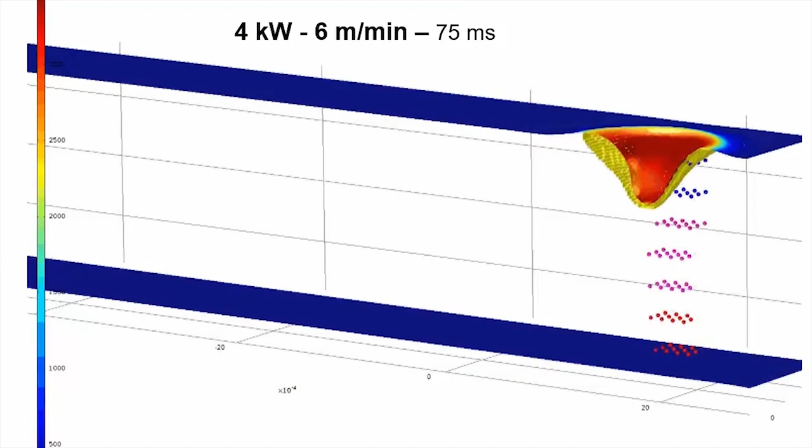Let me explain the significance of this. Choosing a laser for a particular application, whether it's for cutting, welding, or anything else, depends strongly on the beam characteristics. The size and shape of the spot, its rate of divergence, and its distribution of intensity are all very important.

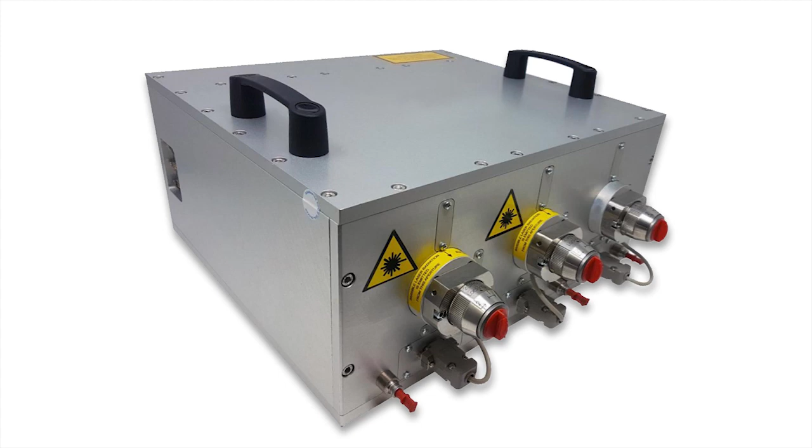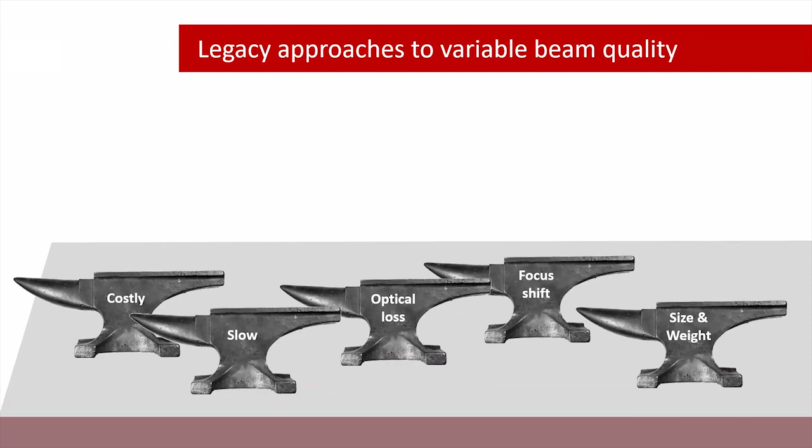Changing the beam quality to address different applications required the purchase of multiple lasers or implementing very expensive accessories. These legacy approaches to variable beam quality introduce significant complexity and cost. We can identify numerous other issues responsible for limiting the acceptance of these legacy approaches to the industrial market.

nLIGHT's new generation of industrial fiber lasers highlight the simplicity of Corona. Programmable brilliance from a single, small format fiber laser, enabling great versatility for machine tools and numerous degrees of freedom to dial in process recipes.

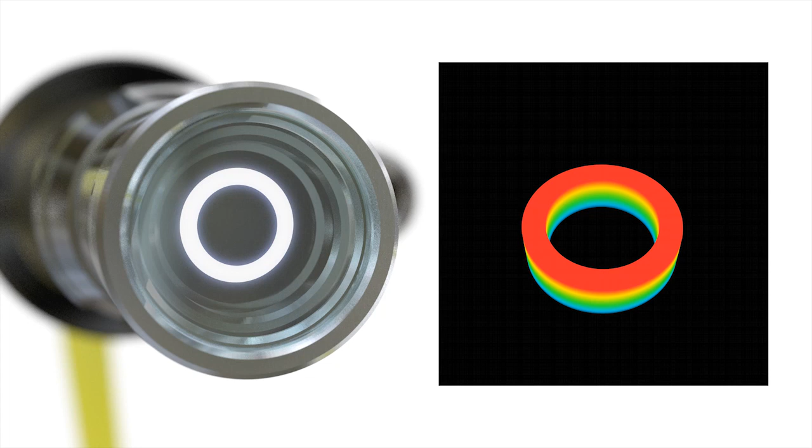Our customers are no longer limited to just a stationary beam profile. They can now switch between a broad palette of beam profiles and do it fast, meaning on the fly and in real time. And of course, implemented with elegant simplicity so it's easy to use and it's highly repeatable.

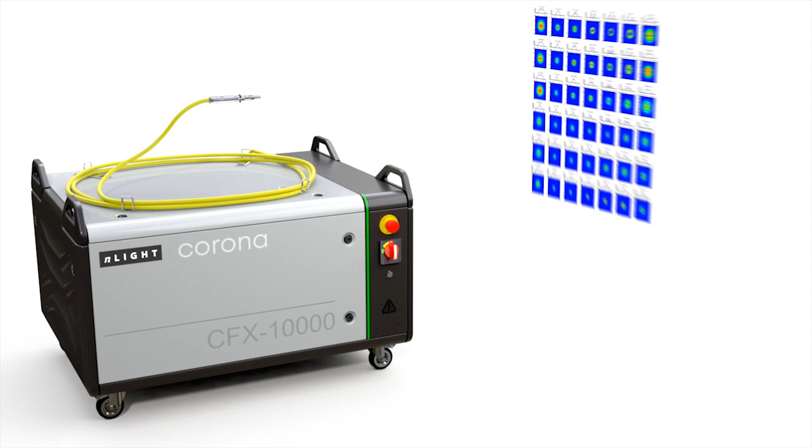Our customers can now be equipped with a powerful toolbox of spatially controlled brilliance that adapts to the specific operation they're performing and the particular type and thickness of metal they're working with. This idea of using software to make photons programmable is truly revolutionary.

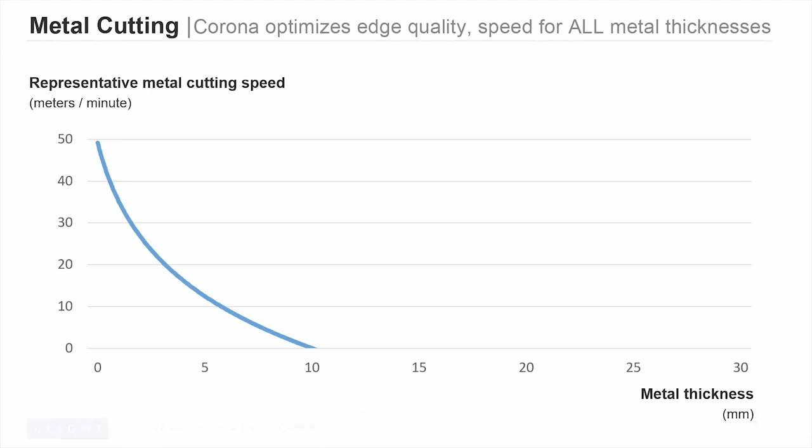Let me illustrate 3 examples of how this is benefiting our customers. For machine shops that cut metal, users have been forced to choose between buying a laser optimized for thin or thick metal. So what do they do? They have no choice but to buy multiple tools.

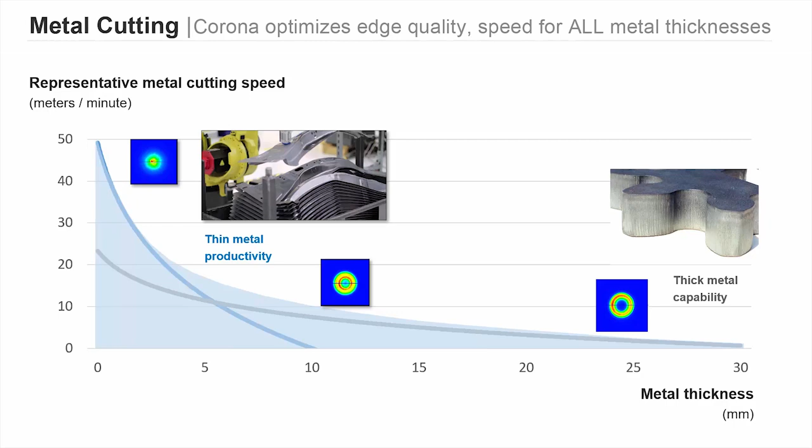Now, with the programmability of nLIGHT's Corona fiber laser, machine tool OEMs in essence have multiple lasers in one, enabling a single cutting tool to process thin to thick metal with the quality and productivity of several optimized laser tools. We expect this to save our customers and end users tens of thousands, if not hundreds of thousands of dollars.

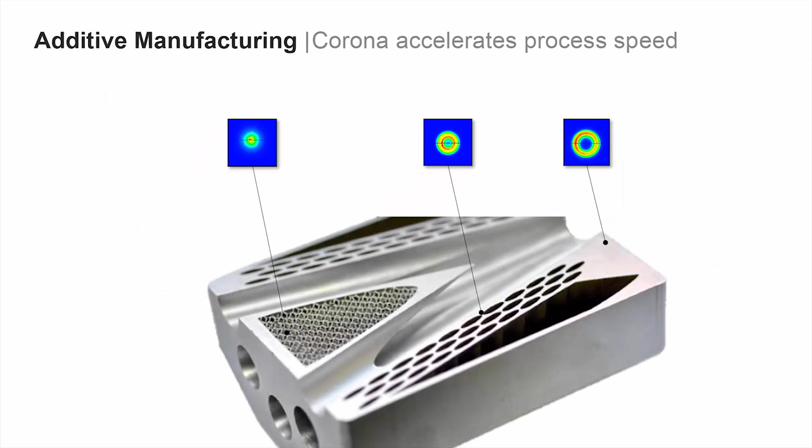The second example is for additive manufacturing. Here, the programmability is leveraged to deliver the optimal brilliance for printing fine scale, intermediate, and coarse features. Configuring the laser like this in real time and on the fly can save up to an order of magnitude in cycle time, dramatically reducing the cost of 3D printed parts.

Laser welding is a third example. The brilliance versatility of Corona can be applied to high-speed switching between shallow conduction welds and deep penetration keyhole welds from a single laser without an expensive beam switch.

Spatter from the weld pool can be reduced, and the width of weld beads can vary on the fly to execute near-perfect joints, despite imperfections in fixturing, edge quality, and part-to-part tolerances.

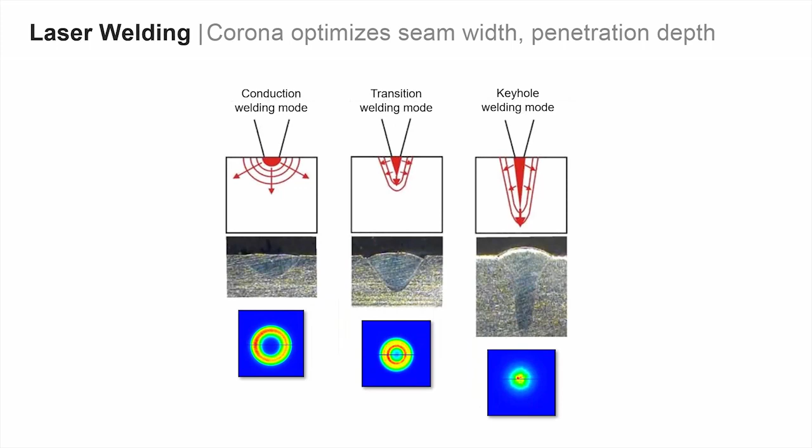We've engineered Corona to be powerful, reliable, and easy to use. Our engineers think it's cool technology. Our customers agree. I'd like to now hand off to Brian Victor, nLIGHT's Global Manager for Laser Applications.

He'll speak to some of the finer points of how Corona is bringing distinct advantages to our customers doing laser cutting.

Typically, fabricators use multiple laser cutting tools to optimize performance for different metal thicknesses. A small fiber for cutting thin sheet, a larger fiber for cutting thick plate, or you can change out a focus lens and sacrifice productivity.

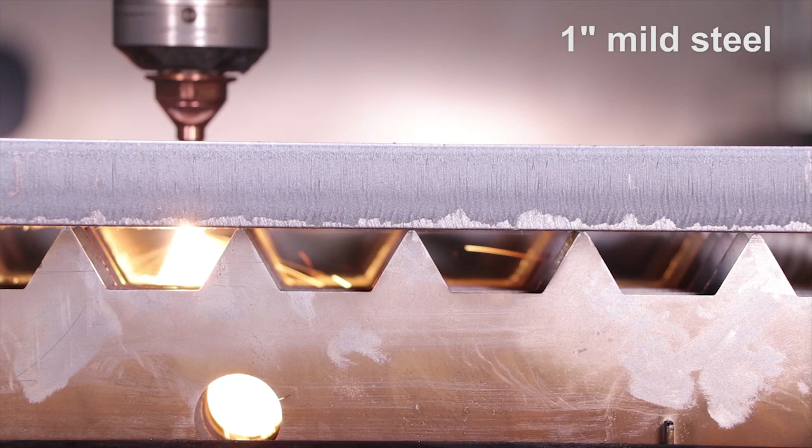Corona offers this same flexibility by changing the beam characteristics inside of the laser. With the same laser, we enable high-speed cutting on thin sheet and excellent edge quality on thick plate, like this 25mm mild steel. With the largest Corona beam diameters, cutting performance on thick mild steel is exceptional.

With an optimized kerf and perpendicular edges, thick parts drop freely from the skeleton, making part removal easy. In fact, for oxygen cutting of thick mild steel, the edge quality with Corona is similar to CO2 laser results.

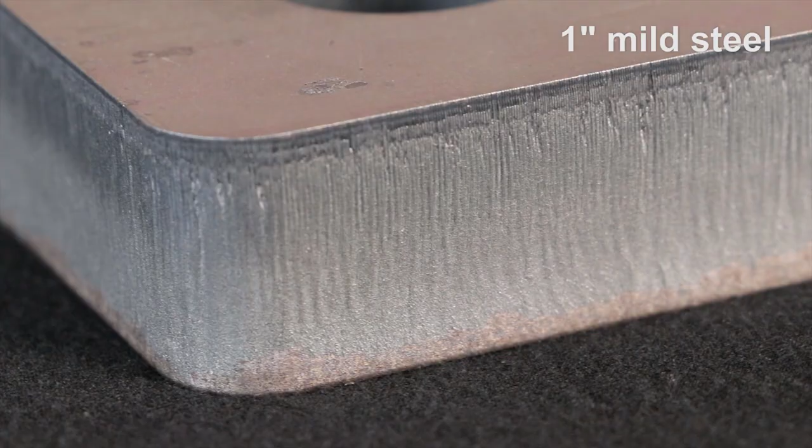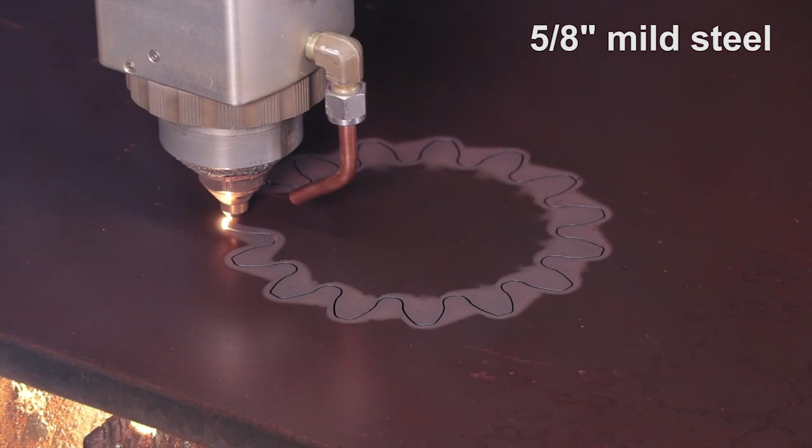On medium thicknesses, Corona offers small spot sizes for maximum speed, or intermediate spot sizes to produce wider kerfs. The wider kerf optimizes gas flow for improved edge quality and reduced dross.

Corona incorporates the same back reflection protection embedded in all nLIGHT's fiber lasers, which is extremely valuable for cutting reflective metals like copper.

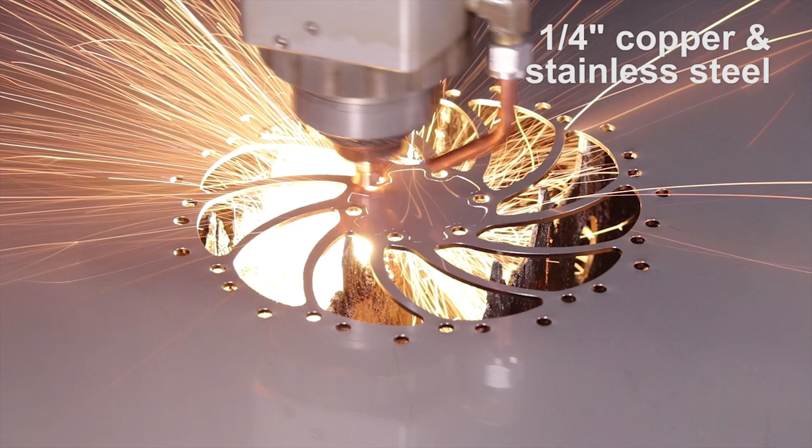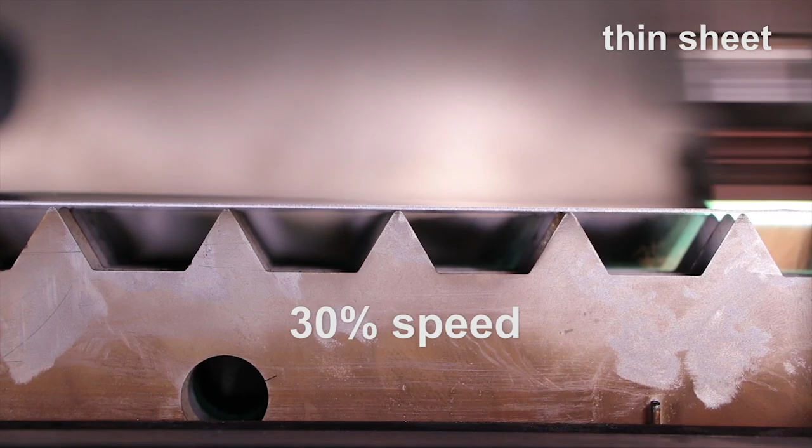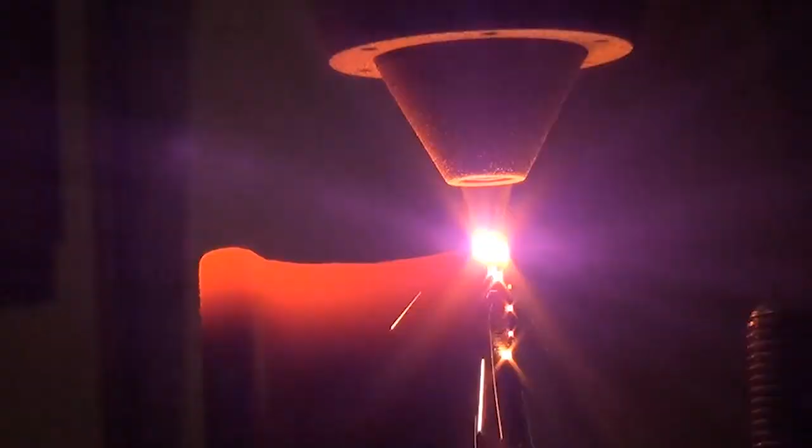For thin sheet cutting, the smallest beam size has the highest power density and the fastest nitrogen cutting speeds. Corona is capable of rapidly switching between different beam characteristics at full power to enable fast transitions from piercing to cutting on the fly.